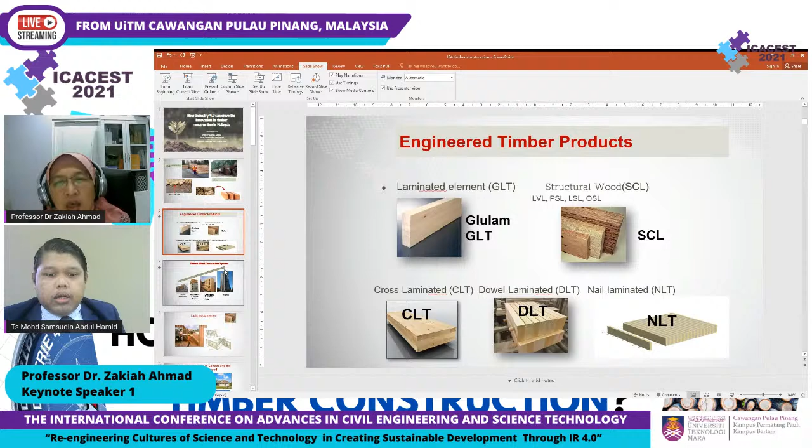So now we are at slide number 3, the engineered timber product. These are the common engineered timber products available overseas, which include laminated elements, glue laminated timber, and cross laminated timber - the most common engineered timber products. Then we have other structural wood products: laminated veneer lumber, parallel strand lumber, laminated strand lumber, and oriented strand lumber. These structural wood products are manufactured using strands or strips of wood, meaning the whole log can be converted into a structural product.

So the sawn timber can be made into glue laminated timber, or into cross laminated timber in solid form, or dowel laminated timber, where each element is connected with dowels, or connected using nails. The glue lam and CLT are joined together using glue. Once you cut the sawn timber, you still have remainder unused timber pieces, which you can make into strips or strands and convert using glue into laminated veneer lumber, parallel strand lumber, laminated strand lumber, and so on. So the whole log can actually be converted into structural elements.

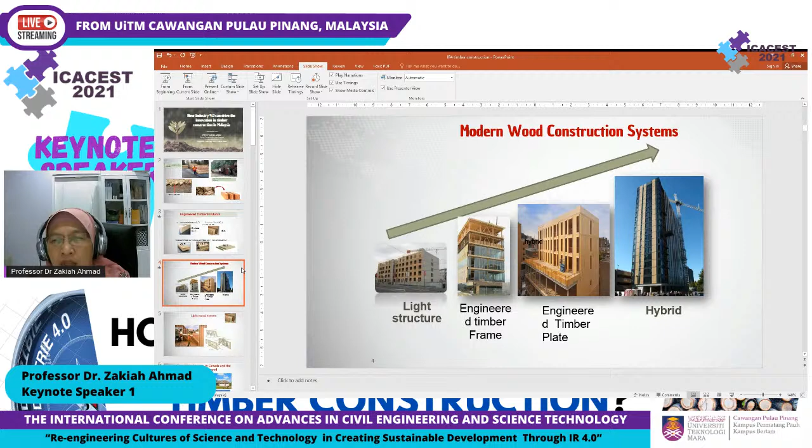For the stability of high-rise timber structures, you can make it hybrid and stiffen it with steel, or concrete, and so on. It becomes hybrid because the requirements in the design for tall timber structures are different, especially when dealing with earthquakes, wind, and stability. So there's a place where hybrid construction can take place.

Now, what is a light wood system? Before I show you how the technology is required in constructing this material and how it can be used in production, let's get some knowledge on the different forms of timber elements that can be used for construction.

I will not touch on kampung houses, because these villages are not designed using any codes, so safety is not considered in their construction. In the design and building of proper housing, new technology and specific standards need to be followed, so the development of standards is required.

For light wood systems, it's a combination of studs and panels. They make a frame using solid timber and clad it or cover it with other timber products, such as oriented strand board, as shown in this photo, or plywood.

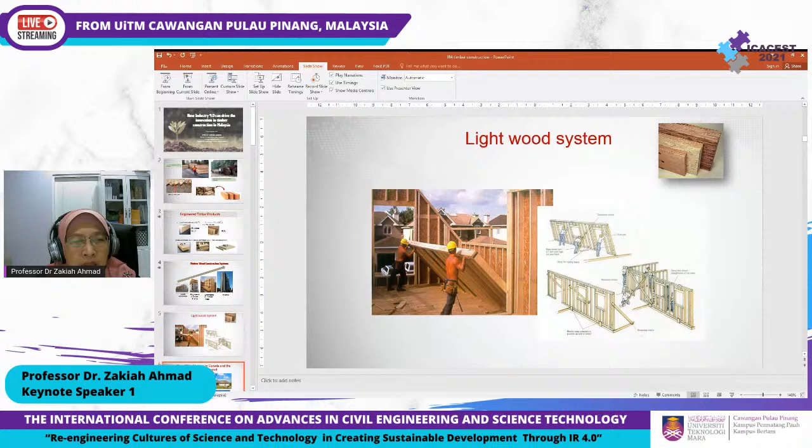This is the common construction method used in Europe, especially in the US, but construction of this type of building will not normally go beyond 3 or 5 stories. The common example of buildings using timber frame products are houses—90% of homes in Canada and the US are light wood frame systems.

But from outside, they look like they are made from concrete. They just use facades from different materials, but the frame is actually timber. They can also make a few-story buildings using the same prefab light wood panel system.

There are different types. They have elements which can be used for roof trusses. The frame elements can be I-joists, made into panels, or made into a modular system.

I wish we could have this in Malaysia. I want to build my house on the land—I can go on the internet or to any company that provides this modular system and order it online, and after one week my house is ready. That would be very beautiful.

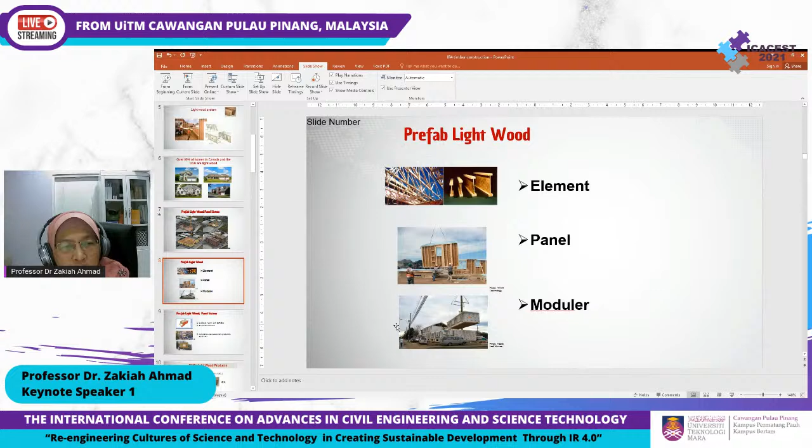In order to assist in the construction and production of those elements, either the I-joist, the panel, or the modular system, IT has to be used in the design. We can use BIM software or structural software in designing the house or building.

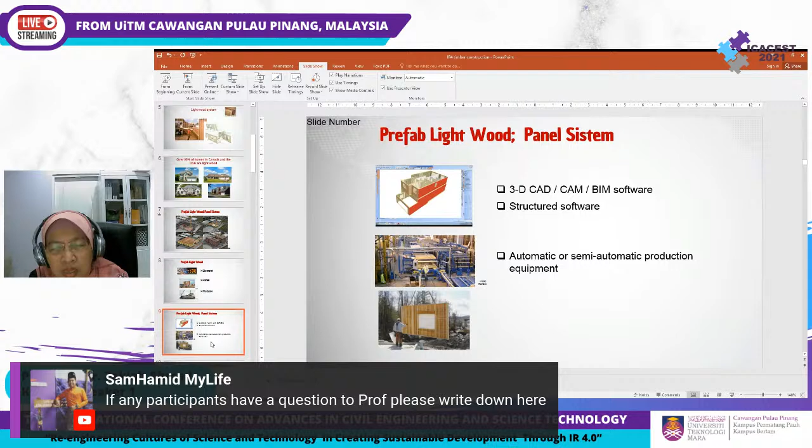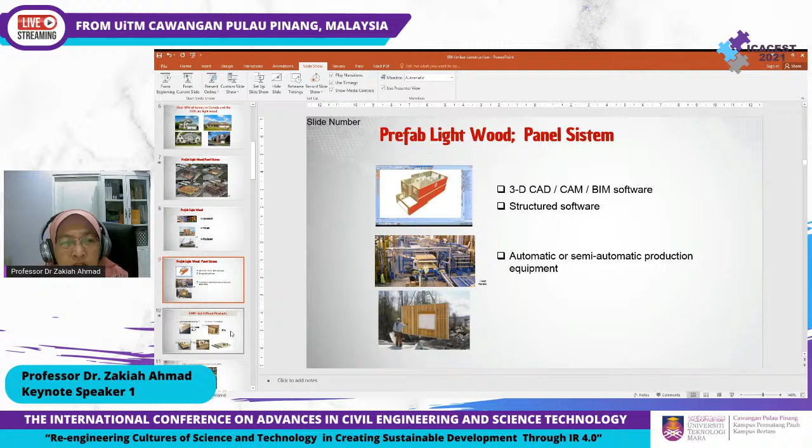But in order to construct the elements, the wall and so on, we can use automatic or semi-automatic production equipment. Comparing this kind of production with manual methods, the time required is hugely different—this can be done in a few hours or days instead. I'll show you a video at the end that will tell you how long it takes to construct certain houses using prefab light wood structures.

Another product getting more popular, even in Asia, in Singapore, Japan and so on, are glue laminated timber and cross laminated timber. Glue laminated timber is constructed by laminating sawn timber—graded sawn timber, because it's for structural application. It has to be graded properly, otherwise it will not be able to carry the load. There are dos and don'ts when we manufacture glue laminated timber, but I will not go into detail.

Only half an hour, all right.

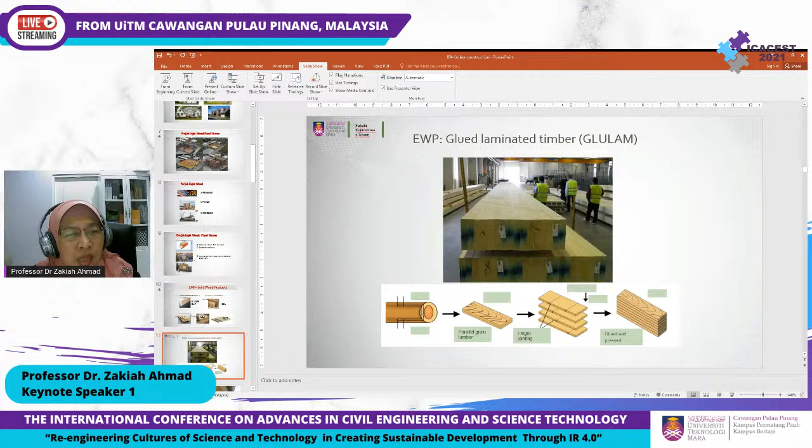The application of glue laminated timber can be in different sizes, because for solid timber we can't do this kind of construction. The maximum affordable size we can get using solid timber in Malaysia is 100 mm width. Beyond that, the price goes up, because getting a good quality sawn timber of more than 100 mm width from one log is very difficult due to natural defects. To use timber for structural application, there is a standard limiting the number of defects allowed in each piece. If not, that piece cannot be used structurally because the strength is reduced so much, depending on the defects inside. That's why we have to do the grading.

So by making engineered timber product into glue lam, the size can be changed depending on the factory and the machinery available for this type of fabrication.

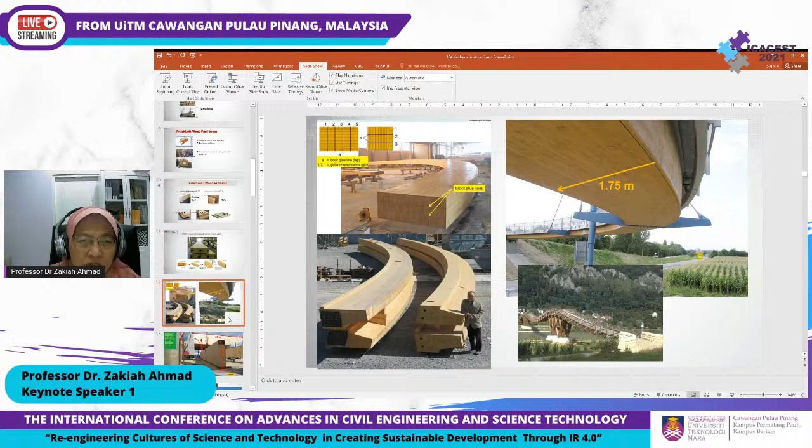This shows examples of glue laminated timber, comparing a normal Asian person with one of the beams—you can see how big the beam is. This is using timber; if using solid timber, no way we could do that. You can see how it was applied to a bridge of 1.75 meter width. Compared to the maximum reasonable size of solid timber at 100 mm, this is 1.75 meters. So by manufacturing engineered timber product, this type of construction becomes feasible.

Here's another example: a 2.4 meter beam with a length of 45 meters. Using engineered timber product and special machinery, the material can be curved—something very difficult with solid timber—which shows the beauty of using timber. This allows architects to be more imaginative when designing structures using timber, giving flexibility and creativity in timber structure design.

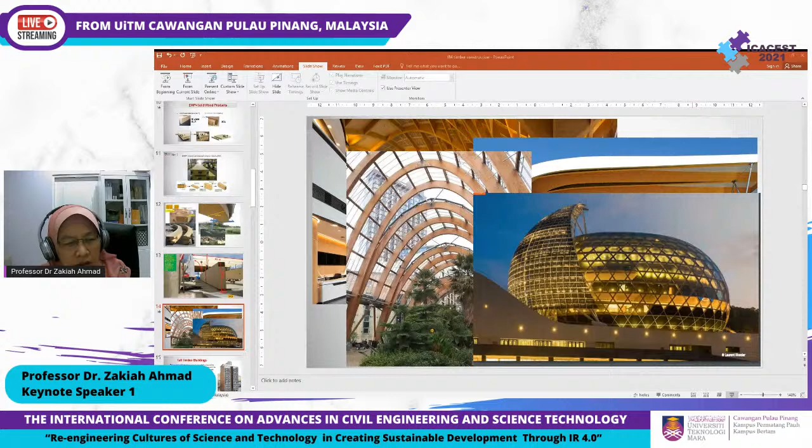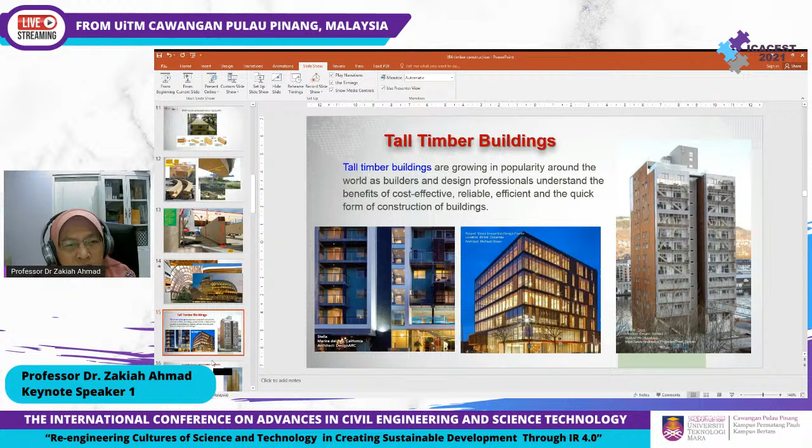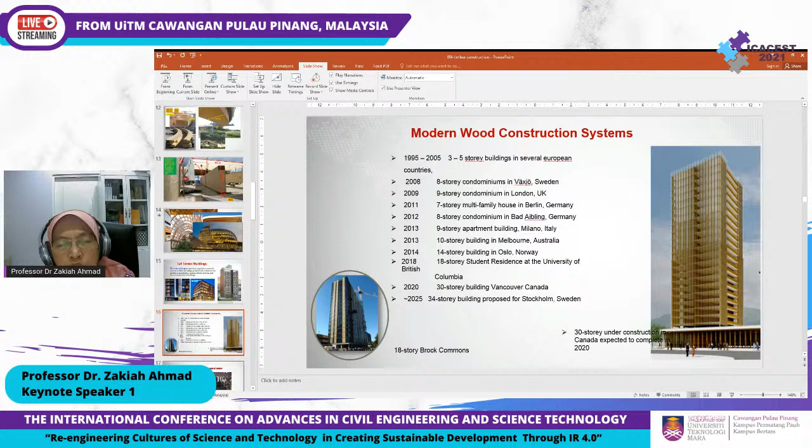By using engineered timber product, you can build structures higher and higher. These are some examples of timber building construction overseas, showing the history of tall timber buildings developing from 3-5 stories up to 30 stories in Vancouver, Canada, and 34 stories in Stockholm, Sweden. So the potential for building high-rise structures with timber is much greater.

Now what's happening in Malaysia? Do we have buildings built using engineered timber product? Yes, but these are still very new. The application of engineered timber product in Malaysia is still considered new—the first commercial building built using glue lam was in 2011. Now it's already 2021, so it's been 10 years, and within that time the popularity of engineered timber product is still very low in Malaysia. We need to promote it more, because timber is a sustainable material and fits perfectly with green building material goals.

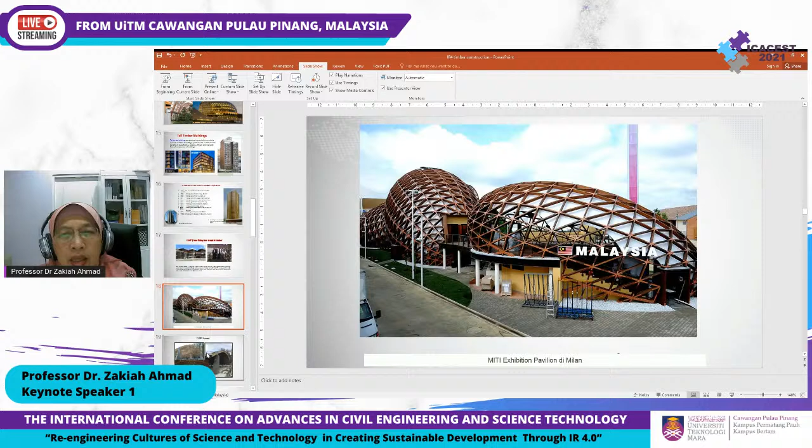We have an example in Johor Bahru, and also one in Milan during the MITI exhibition, where our pavilion was made from glue laminated timber. We also built the TLDM multi-purpose hall—originally designed using steel, but due to corrosion at the seaside we proposed timber instead, at the same cost. In fact we still made a profit, because if the original design had used timber from the start, the foundation cost could have been much less, reducing the overall cost.

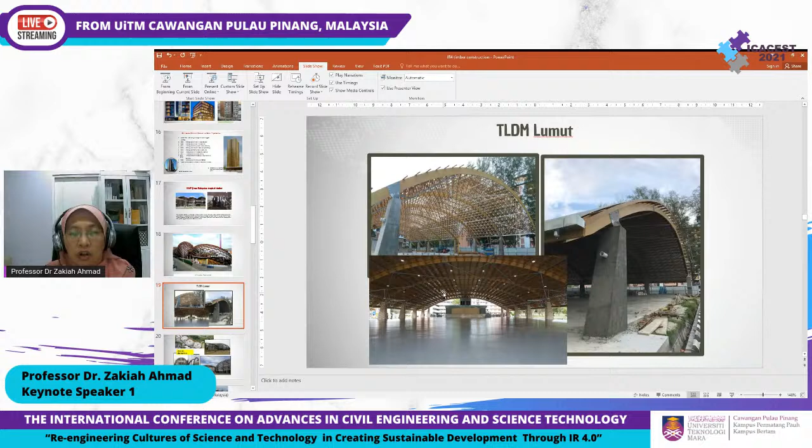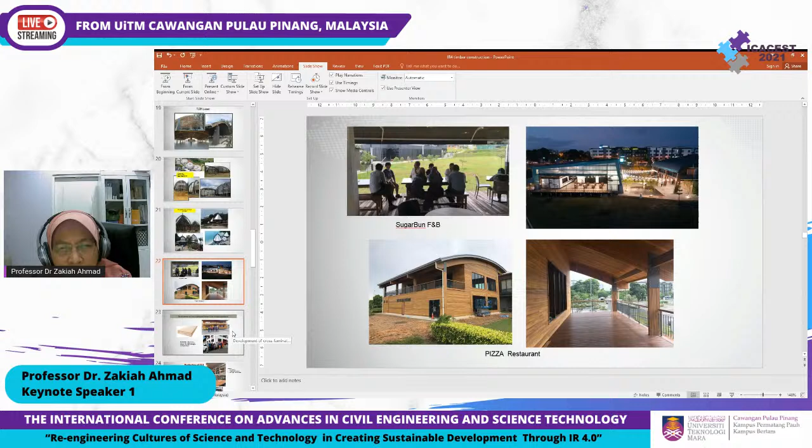We also have projects in Semenyih—the CFRC building—and the Ritz-Carlton Hotel and Resort Langkawi. We've also used glue lam timber in building restaurants in Johor Bahru; there are a few restaurants built this way and they are very impressive. Now in Malaysia we are also trying to move toward other famous products used in Europe, the US, and overseas.

This is cross-laminated timber (CLT), because now people are crazy about using this type of product in constructing tall story buildings and huge commercial buildings, due to the fast construction time.

This is my research that I work together with two factories in Europe, because we don't have a factory in Malaysia constructing CLT, and we don't have the standard available in producing CLT. So in order to allow our Malaysian factory to produce CLT, we need to provide a manufacturing standard, because European timber and Malaysian timber are different.

The requirement in production will be different, the pressure, the glue, and so on. So in order to develop the manufacturing standard for Malaysian CLT using tropical hardwood, I have to produce the CLT in current commercial factories in Europe, which use two different types of production, one by vacuum press and another by hydraulic press. So we chose two different factories, in Germany and in Italy.

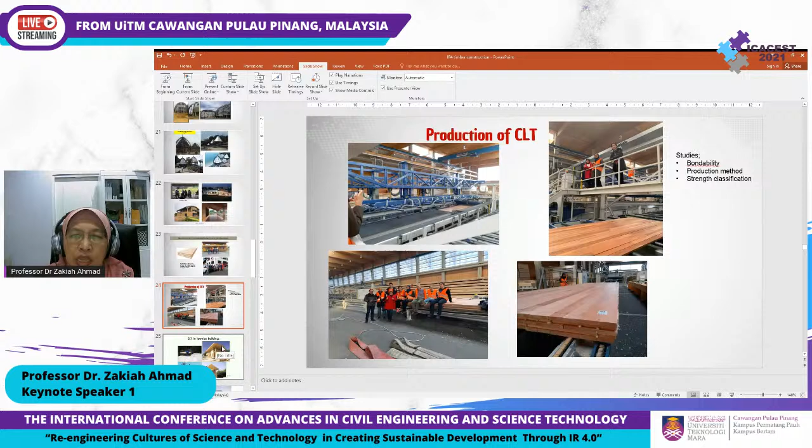So these are some examples from our production. We have produced the first CLT from tropical hardwood in Europe. Now our standard is in the stage of being developed. Inshallah, once the standard is available, the factory can take it up and produce CLT for the Malaysian industry, and the CLT can be used in buildings like this.

It's very fast. By using panels, you just connect them like Lego. But it has to be a proper design. Definitely, it has to be a proper design. The design values must be there.

That opens up a lot of opportunity for Malaysian researchers to work on this, because we have more than 3,000 timber species, and each timber will have different properties. So this opens up a lot of opportunity to develop strength properties for design purposes, if you want to use CLT from Malaysian timber.

In Europe, they have the standard. They have already identified a few species only for the production of CLT and glulam, because their number of species is very limited compared to Malaysia.

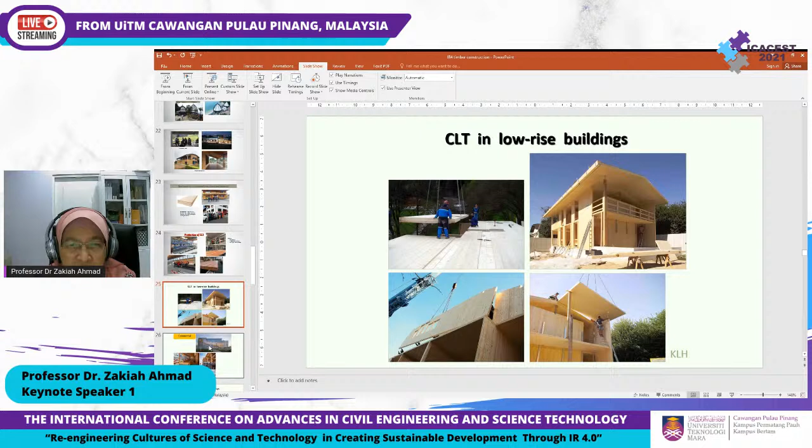Now they have moved from low-rise building into commercial building, mid-rise building, and high-rise building by using CLT, and the construction is much easier to handle and much faster, because we are talking about money when dealing with construction. We want to save a lot on the financial side, so these are the best products to use.

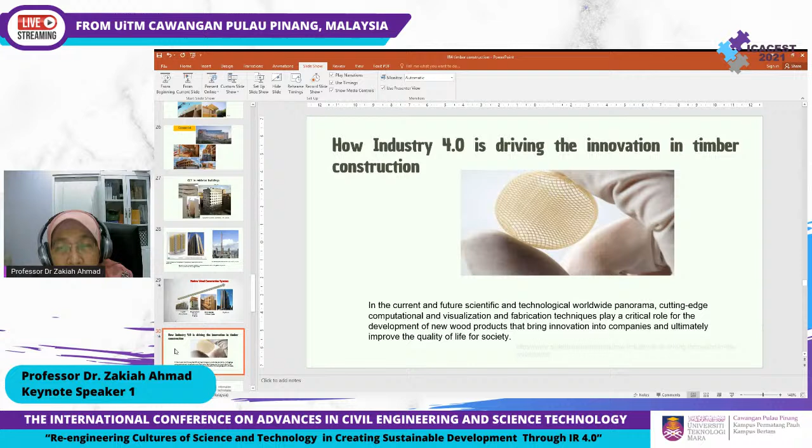Now, how is Industry 4.0 driving innovation in timber construction? In the current and future scientific and technology panorama worldwide, cutting-edge computational, visualization, and fabrication techniques play a critical role in the development of new wood products that bring innovation into companies and ultimately improve the quality of life for society.

We know that information technologies play an integral part in architectural design, because the architect will do the form and concept, putting in information about wood design and transferring it to the civil engineer in order to do the construction.

By using information technologies, it will assist in the construction of timber structures.

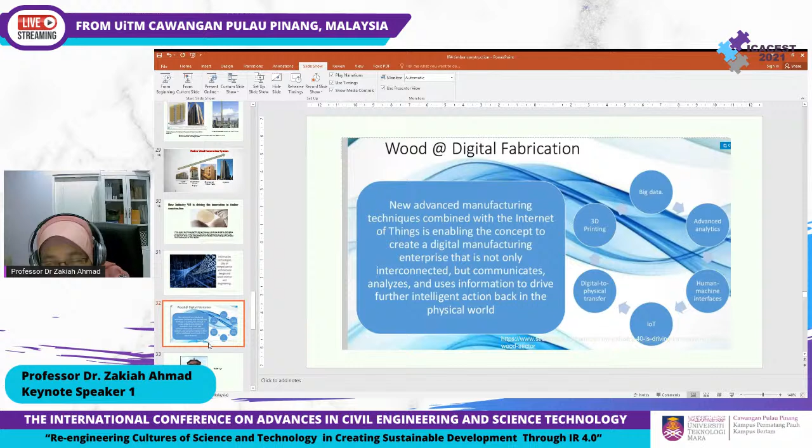Now, new advanced manufacturing techniques, because when dealing with huge amounts of timber for constructing tall buildings, doing it manually is not feasible. We need new advanced manufacturing techniques that combine the Internet of Things to create a digital manufacturing enterprise that is not only interconnected but communicates, analyzes, and uses information to drive further intelligent action, in order for us to produce thousands of tons of timber product for construction, for example, like this.

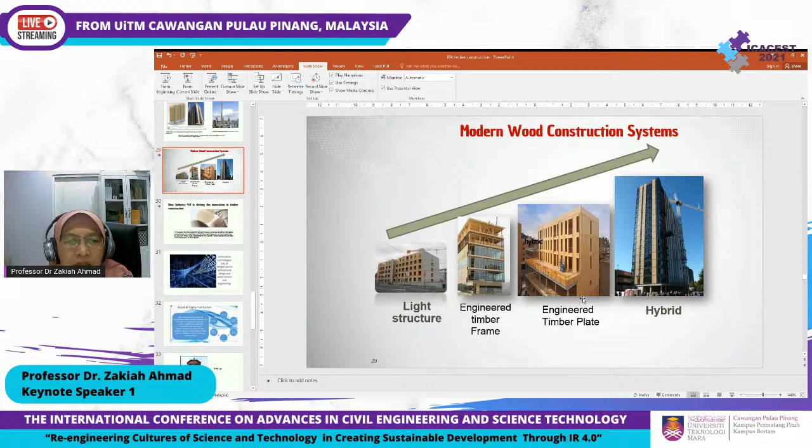Just imagine if you have 30 or 40 stories, how much volume of timber is being used. If you want to slice the timber using normal sawing and then make it into engineered timber plate, that would be ridiculous. So therefore, the IoT is needed.

This is the reason for an increasing amount of interest in computational design and fabrication processes, as well as the use of industrial robots. Digital fabrication substantially expands the range of manufacturing process possibilities and offers more freedom for developing innovative, material-oriented, and adaptive construction systems.

But now looking at this building in the digital age, the new advanced manufacturing techniques combined with the Internet of Things enable the creation of digital manufacturing enterprises that are not only interconnected but communicate, analyze, and use information to drive further intelligent action in the physical world. The digital age in manufacturing is revolutionizing how we design, develop, fabricate, distribute, and consume products.

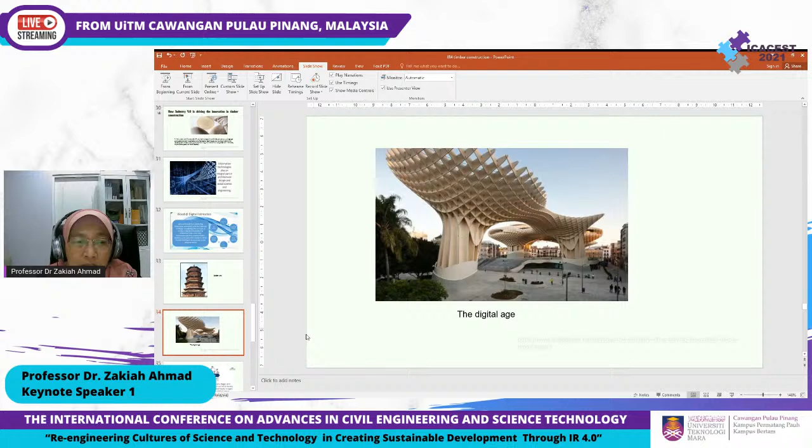Manufacturing has undergone many evolutionary stages and paradigm shifts, going from a craft industry to mass production, then lean manufacturing, and finally to agile manufacturing and mass customization. The digital age in manufacturing is giving rise to output devices that allow rapid customization and manufacturing, revolutionizing how we design, develop, fabricate, distribute, and consume the product.

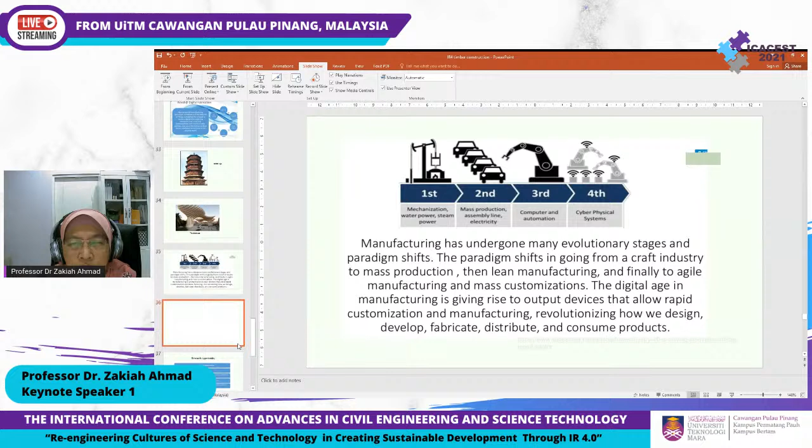We can see that manufacturing has moved from using manual methods into cyber physical systems under IR 4.0, so the timber industry also has changed and moved to that. I now want to share with you the IR 4.0 for the timber industry. It will take some time, about a few minutes.

Sorry Prof, we cannot see the video actually, because on our screen here it's not showing. We cannot watch the video. Oh my goodness, why? That's a problem, that's why I sent you guys the link. So what do I do now? I cannot show it. If you refresh it, can you see it now? Yes, now we can see it. Okay, thank you.

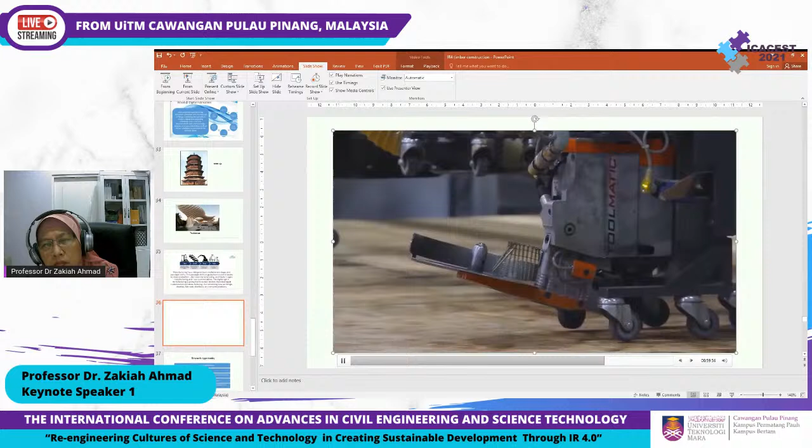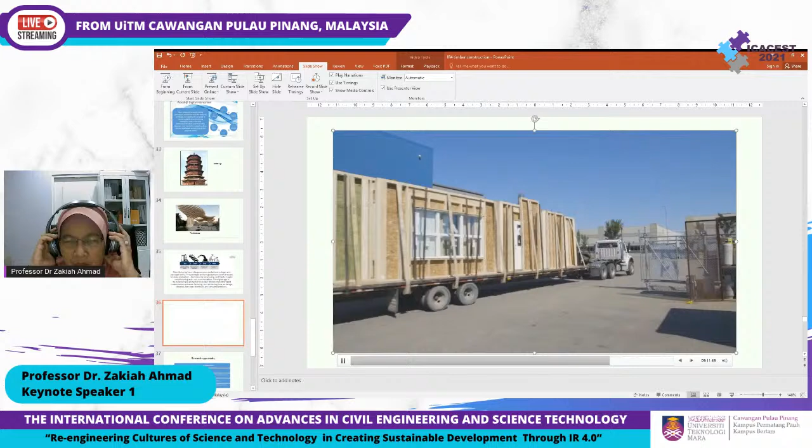I think I can stop now. I've already given you some of the ideas on how IoT has been used in the production or construction of timber buildings using light frame structures. Similarly, when we are doing it for glulam and also for CLT.

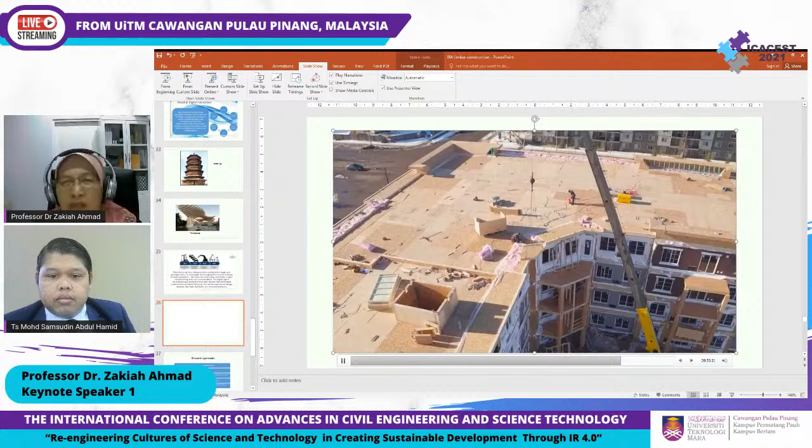Okay Prof, okay, I thought it would take so much time. All right, okay. Now, research on Industry 4.0 is relatively a new topic.

The term is well known not only in academia but also in the industry. By definition, Industry 4.0, or the fourth industrial revolution, refers to the Internet of Things and the Internet of Services integrated with the manufacturing environment, where all industrial businesses around the globe connect and control their machinery, factories, and warehousing facilities intelligently through cyber physical systems by sharing information that triggers action.

With that, there are a lot of research opportunities for us here in academia and also for industry to work together in different areas. For example, in design: parametric design, simulation, generative methods, highly complex architecture, manufacturing, fabrication, and assembly using 3D printing, CNC, and robotics.

In information materials, we can also apply smart materials that respond to stimuli and can incorporate sensors and transmitters, also novel wood-based 3D printing materials. This shows the synergy between civil, mechanical, electrical, and computer science together—especially in Malaysia, we are very limited in this. Smart systems and structures, monitoring control systems, digital control, interactive building elements, and visual engineering networks, virtual reality tools that open up new ways to work together and bring new forms of collective creativity to design and architecture.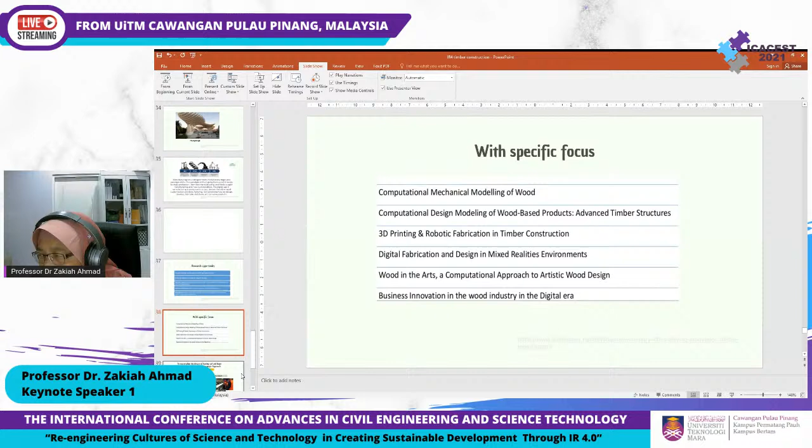The research will have specific focus on computational mechanical modeling of wood, because right now the available software uses data from softwood timber, so it's very lacking in tropical hardwood data. Computational design modeling of wood-based products, advanced timber structure, 3D printing, robotic fabrication in timber construction, digital fabrication and design in mixed reality environments, wood in the arts, computational approaches to artistic wood design, business innovation in the wood industry in the digital era.

These open up a new era of research in timber construction in Malaysia. So we have to think about not just looking at the properties of the timber alone, as that would not put us far advanced in the area of timber construction in Malaysia.

At the same time, with doing the design, we have to have hardhat tours. We need to see how they design, what kind of software they use, whether that can be applicable to our industry, how we can incorporate that in our teaching and learning, and how we can change our syllabus so it can impart this information for advanced technology in timber construction.

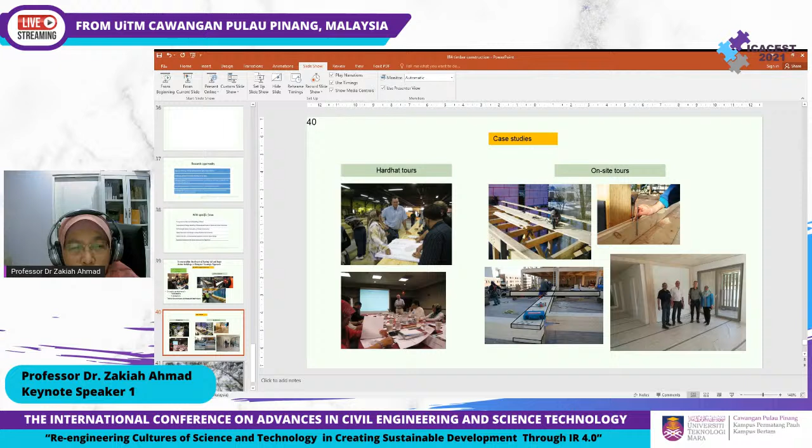So with this talk, I throw these ideas to all the participants here. There are a lot of opportunities that we can work on, and how we can bring this timber construction in Malaysia into reality. So with that, I thank you.